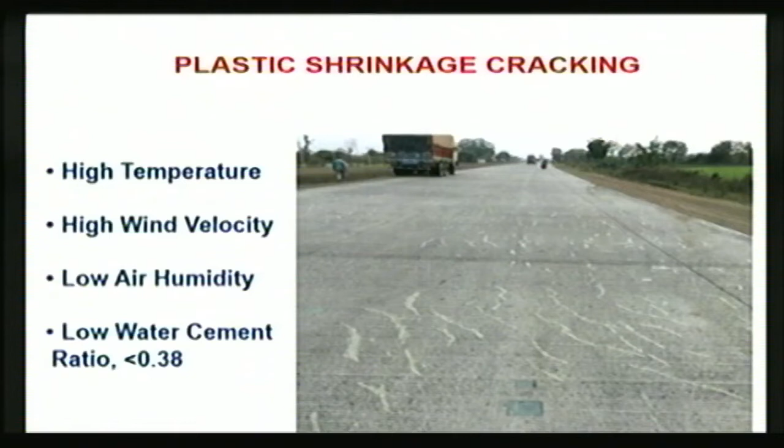These are the same kind of plastic shrinkage cracking. If you use GGBFS, your tendency of plastic shrinkage cracking will be very low. If you use fly ash along with the reduction of water cement ratio, you will have a very high tendency. For normal concrete, it may occur, but the tendency will be low.

Now, how to repair a concrete pavement? It is very difficult to repair concrete. In the context of concrete pavement, we always say prevention is better than cure, because if something happens to the concrete, you have to break it, remove it, and fill the patch with fresh concrete. So breaking and removing the concrete, even if it is a very low grade, low strength concrete, it is a hell of a job. It is very tedious and very difficult. So it is better that all these types of distresses do not appear.

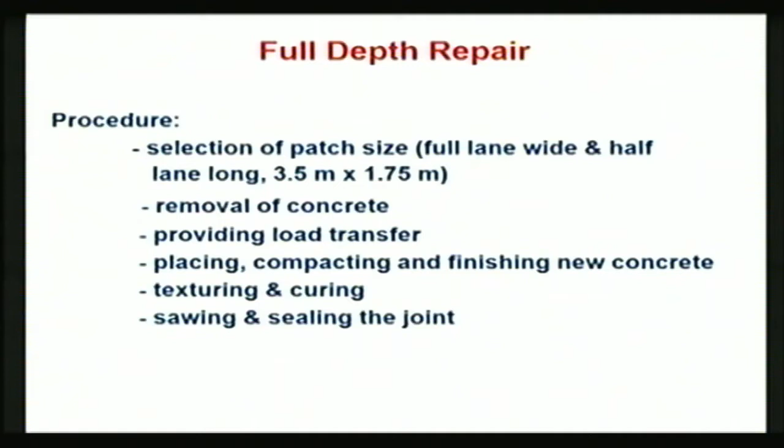Take due care during the construction removal. Width of that portion should also be minimum 1.5 meters. If it is less than 1.5 meters, then it will not behave like a slab. It will behave more like a beam, and different kinds of stresses may appear in that repaired area. So you have to cut the entire concrete, then break it and remove it.

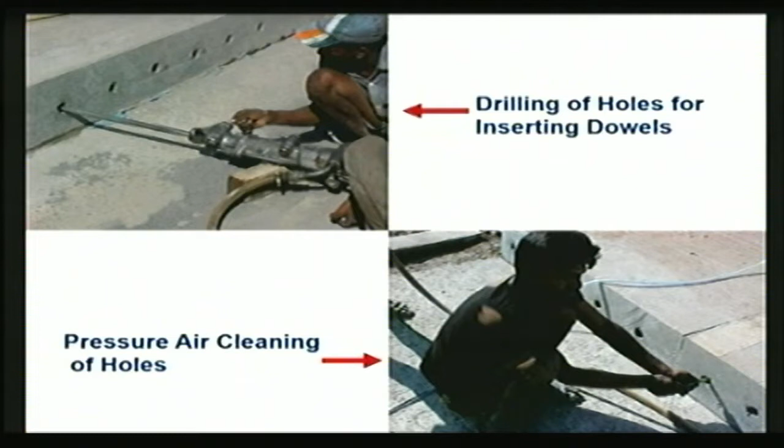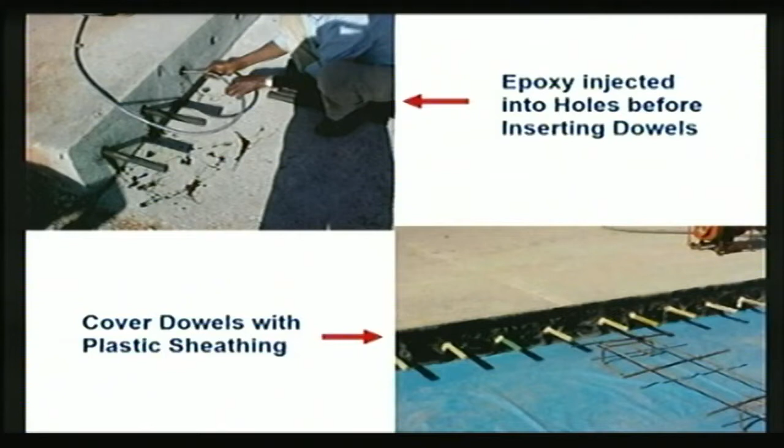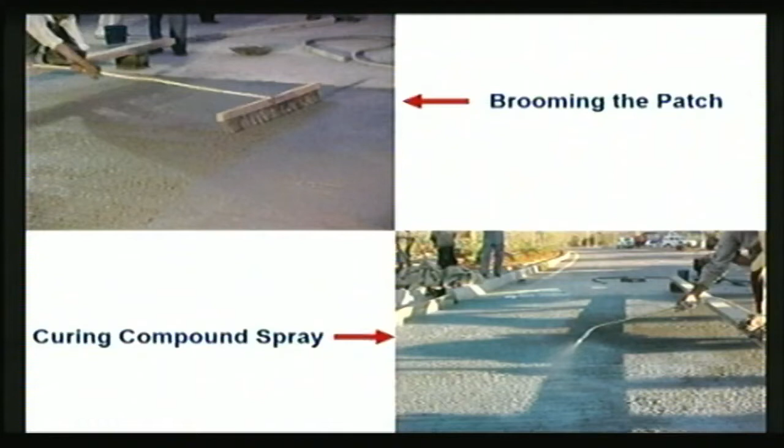After you remove the concrete, you will have two full depth joints. You have to insert the dowel bar: first create the dowel holes, clean out the dust, then neat epoxy is inserted into the dowel holes, and dowel bars are fixed. You can place sheathing caps or plastic caps over the dowel bars, and if the subbase is also damaged, repair the subbase too, then fill it with fresh concrete, compact it, texture it, and use curing compounds so that plastic shrinkage cracking can be avoided.

Sometimes a slab has more than one full depth crack - suppose it has two full depth cracks - then the whole slab will be divided into three parts, so the entire slab has to be removed. The code says we do not accept more than one crack in a slab. If it has multiple cracks, you have to remove it up to the full depth, following the same procedure.

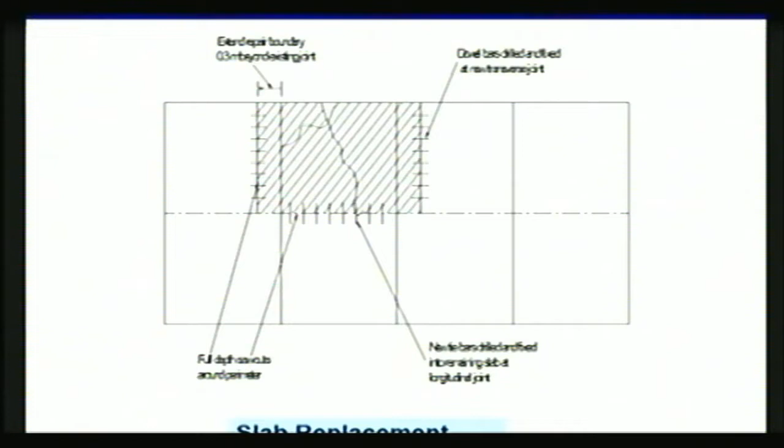But whenever you remove the full depth slab, it is not just the slab, but some extra portion too. Whatever dowel bar assembly exists on both sides has to be removed also, because during removal and breaking of the concrete, all the dowel bars may become loose and will not be effective. So the dowel bars on both sides of the joint have to be removed, and then the entire patch has to be filled up with fresh concrete, compacted and finished the same way.

This is another way of cracking. If you do not do the sawcutting at the proper time, you will observe full width and full depth transverse cracks appearing at an interval of 10, 12 or 15 meters. Those cracks are called working cracks, because they are not structural cracks - though full depth and full width, they did not occur because of structural failure of the concrete. It occurs because you could not cut the joint at the proper time with proper depth.

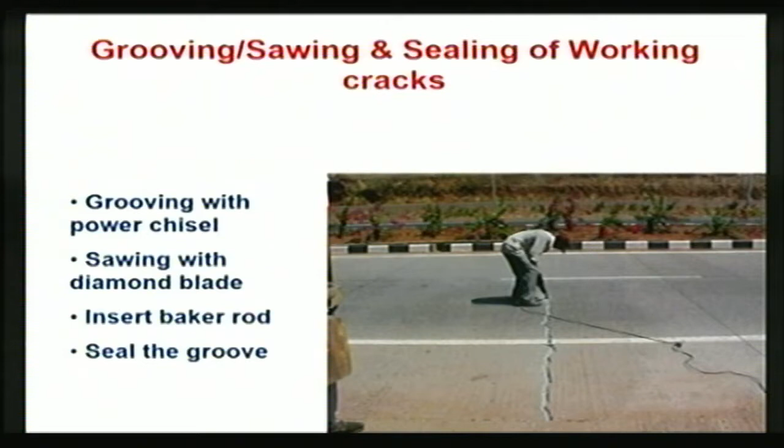So those joints are actually working as a joint, accommodating the expansion and contraction of the slab. So those cracks may be treated like a joint. And what do we do at the joint? We create a groove at the joint and seal it so that water, sand and silt do not enter. We can do the same thing here - if it is a working crack, just prepare a groove along the contour of the crack and fill it with polysulfide or silicone sealant, whatever we normally use for joints.

This is cross stitching. Cross stitching is always used for longitudinal cracks. Any longitudinal crack, before it opens up too much, you have to fix it - you have to cross stitch it. Cross stitching will not prevent the crack from occurring further. What it will do is keep the longitudinal crack intact, in a very close form. It will not allow it to widen up further.

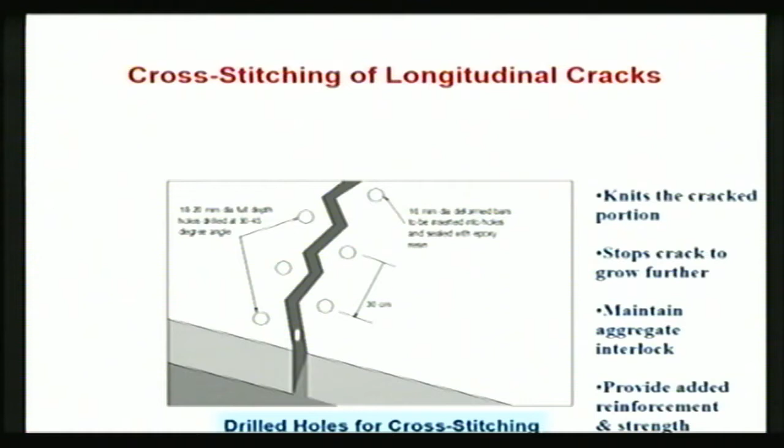So for that you have to do cross stitching. Cross stitching is never done for a transverse crack, because transverse crack movement is allowed, but we do not allow movement at longitudinal cracking - that's why for longitudinal cracking we go for cross stitching. In cross stitching we make inclined holes from alternate sides, then dowels are inserted into those drill holes, and the annular space is filled with epoxies and mortar. On the top surface we will see only circles like this - we have a longitudinal crack which has been cross stitched, and you can see only circles at the surface.

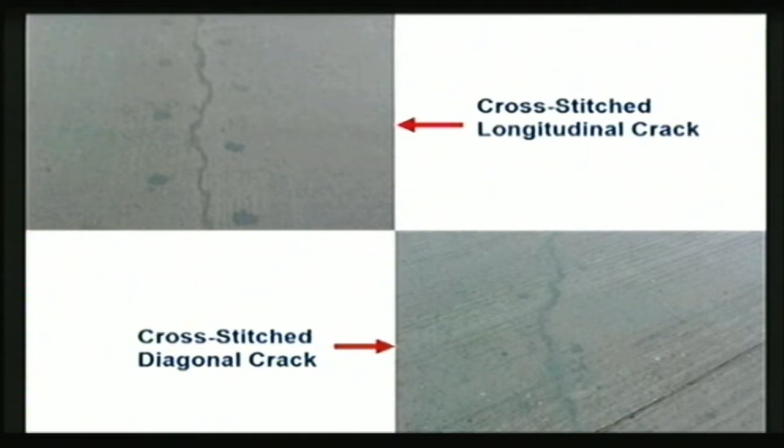Otherwise, dowels exist inside all these drilled holes. So cross stitching will not allow the longitudinal joint, the longitudinal crack, to open up further.

Plastic shrinkage cracking, you have to take care. Just after the finishing of the concrete, you must use curing compound. Second, you can cover your surface with plastic sheets also.

And third, if you have a very high tendency of plastic shrinkage cracking, keep some jute bags ready in moist condition. Water should not be draining out of them, they should just be in moist condition. After texturing the surface, cover the entire surface of the concrete gently, because concrete is still in a green state. If you throw the bags over the recently completed concrete surface, all texture will go. So you have to put all jute bags very gently on the textured surface.

Sir, 2 minutes. It's okay, sir. It's over now. So plastic shrinkage cracking is preventable.

First, see your mix. It should not have a very low water cement ratio. Normally we do the concrete PQC at 0.38 and 0.4 water cement ratio. That is the ideal, that is the best water cement ratio. Do not come down to a water cement ratio of 0.32 or 0.33 just for the saving of cement.

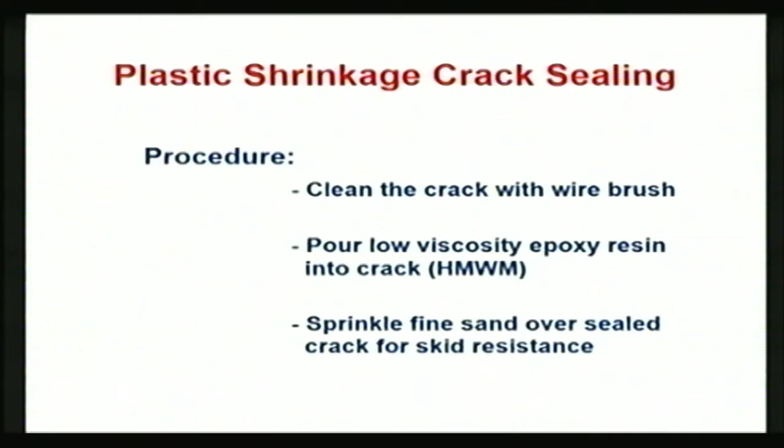You can save the cement if you use slag in your concrete pavement mixes. So see what is the mix, it should not have a very low water cement ratio, and then cover the surface with plastic sheathing and moist jute bags.

If you are not able to do that and plastic shrinkage cracking has occurred, then they will remain there throughout the entire life of the pavement. What we can do, later on we can fill them with neat epoxy.

First, clean the crack with a wire brush so that every bit of dust comes out, and then you can have a water-like thin epoxy that can be filled into the cracks.

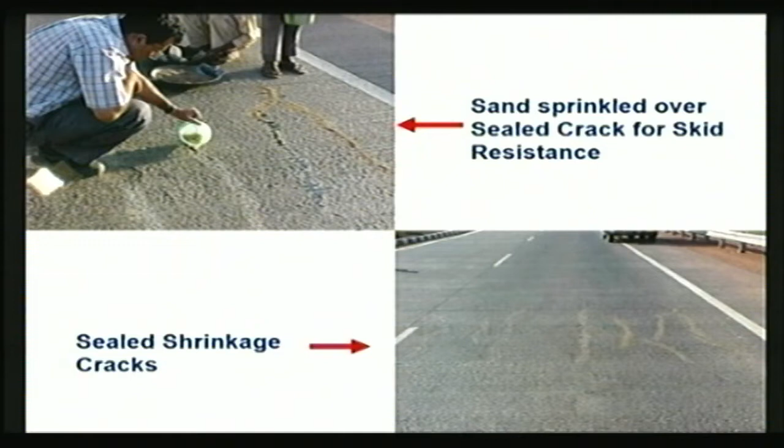And after filling the cracks, you can spray some fine sand over the epoxy so that it bonds with the epoxy, and you will not have a very shining or very smooth surface which is prone to the skidding of vehicles.

This is the last point. If your concrete is very poor, then after opening the traffic, you will see a very rough surface, with the total texture removed from the surface. It is an indication that your concrete is not of M40 grade, and definitely it is less than M25 grade, because concrete up to M25 or M30 grade may have some traffic without removing the texturing for some time.

But whatever we suggest for concrete pavement for national highways or state highways, it should not be less than M40. If the surface has been abraded, it is a clear indication that your concrete is of poor quality, and there is no other way - then you have to go for a bituminous overlay, either mastic asphalt or BC, or again you have to go for a bonded concrete overlay.

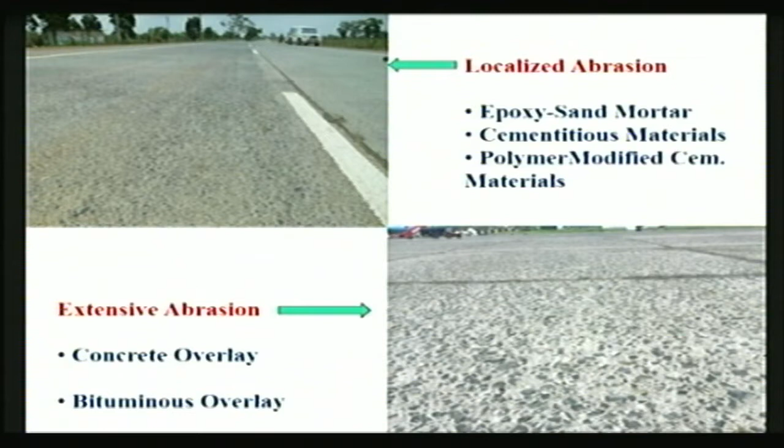So always use concrete of proper mix. So I repeat, pay attention to your concrete mix, take care of plastic shrinkage cracking just after 2-3 hours after placement, and make saw cut joints after 8-10 hours to 24 hours.

Complete all these and take care of uniformity of the support. If you take all these care during construction, I can guarantee that whatever pavement has been designed for 30 years, its actual service life will be more than 30 years, and examples have been there.

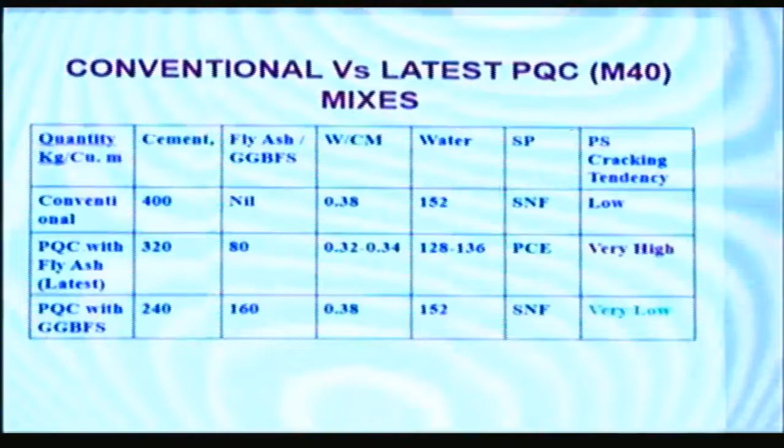When PQC is made with fly ash, a normal mix without it has 400 kg cement with a 0.38 water cement ratio. When you replace cement with fly ash, you come down to 320 kg cement plus 80 kg fly ash. But to achieve the same 7 days or 28 days strength, you have to lower the water cement ratio to 0.32 to 0.34, and you have to use PCE based super plasticizer, because only PCE based can give you workability at that lower water cement ratio.

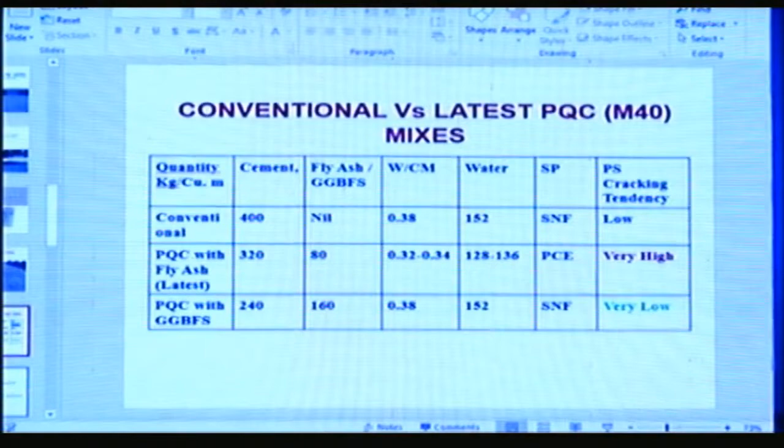And if water is very less in your mix, your tendency of plastic shrinkage cracking will be very high, because the rate of bleeding will be very low and rate of evaporation will be too high.

In case of GGBFS, even if you replace 40% of the cement by GGBFS - that means 240 kg cement, 160 kg GGBFS - you can keep water cement ratio as it is, 0.38, without any downfall in your 28 days strength. And you can use the normal naphthalene based super plasticizer. Even you can use PCE base also, but there is no need to lower down the water cement ratio.

What I wanted to say is that in all these three cases, you can always use a lower grade plasticizer without any cracking issue. It has got nothing to do with the base of the plasticizer - it has something to do with the mix. You can use any plasticizer for workability.

Last Friday, around the same time, me and Vinod had a similar discussion in Delhi - you can use any plasticizer, but keep the water cement ratio at 0.38.

What he means is just to reduce cement, don't go into a high-end PCE based admixture. Am I right, sir? Right, sir - just to reduce cement, don't go into a high-end one. That would lead to more cracks than going with SNF, or a combination of SNF and mid PCE.

Water cement ratio is critical. Whatever be the kind of super plasticizer, it should not be less than 0.37 or 0.38.

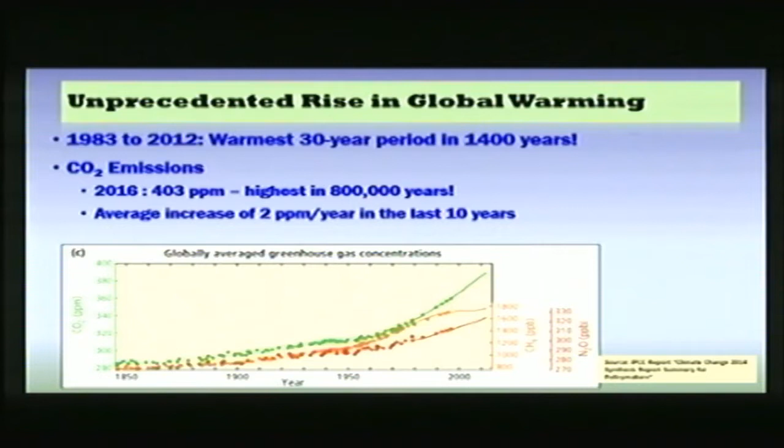We are facing literally a very serious situation as far as global warming is concerned. Some data shows that the average increase has been 2 ppm for CO2 and other greenhouse gases. A very serious situation. Why has it happened? Of course we can always blame the population rise, that our Mother Earth is unable to sustain such a large population rise today.

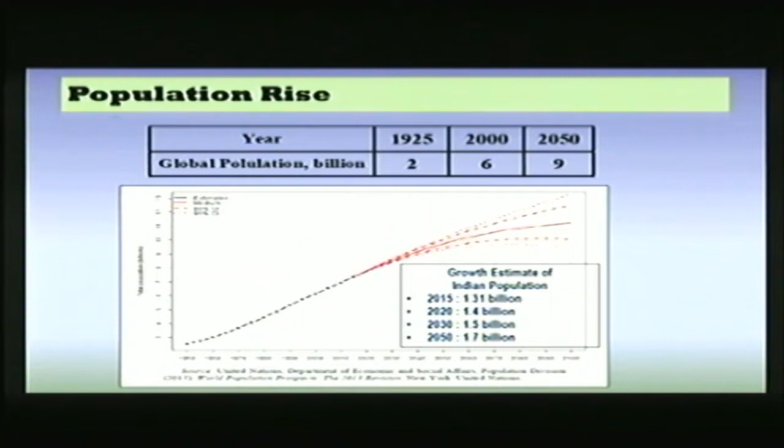Even India, we are experiencing a very large population rise. Then, to sustain such a large population, the industry wheel must go on. And the urbanization and industrialization has been happening. We are experiencing a reversing trend here as far as the urban scenario is concerned.

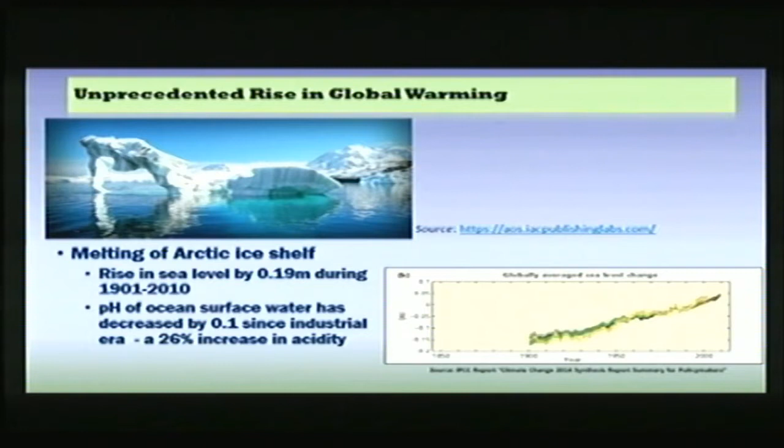And then, this has also happened as far as the levels of the sea have risen. The water of the sea itself is unable to absorb CO2. Now it has become acidic. And all this has resulted in a situation where we are also, in India, experiencing a similar scenario.

We have been expanding our urban centers. We were just 25 million-plus cities. In 2011, we changed to 53, so almost doubled. And all this has been happening simultaneously, a lot of development, including the use of concrete, which is essential, I would not deny it.

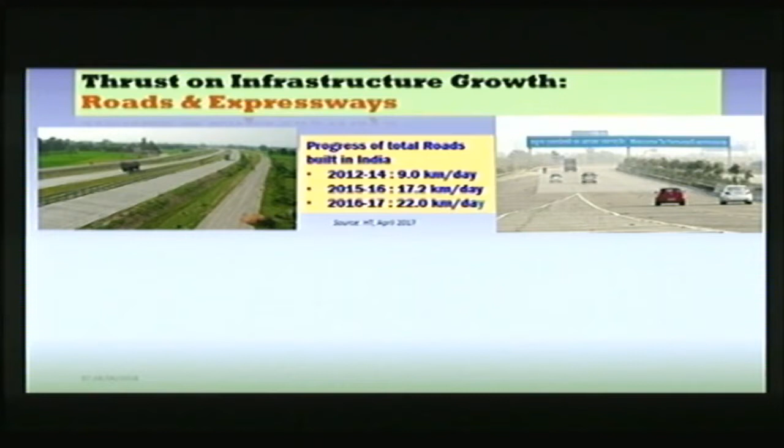But the question is whether such development is sustainable. We have large projects going on at the moment, and also we are experiencing simultaneously extreme events.

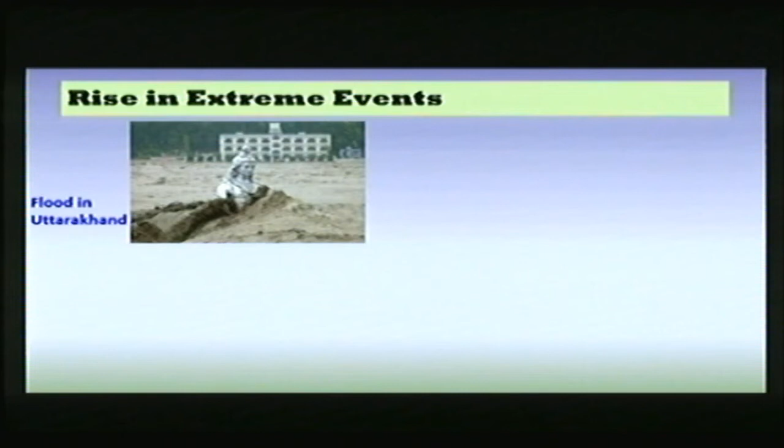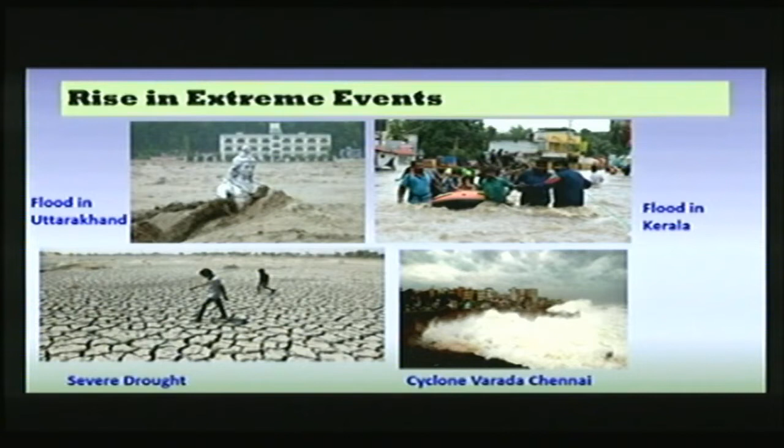In 2013 we had floods in Uttarakhand. We have recently had floods in Kerala. We have drought in some parts of the country, and we have a cyclone in some part of the country. So extreme events - everybody agrees, all scientists agree, that it is because of the rise in CO2 emission and because of the rise in temperature.

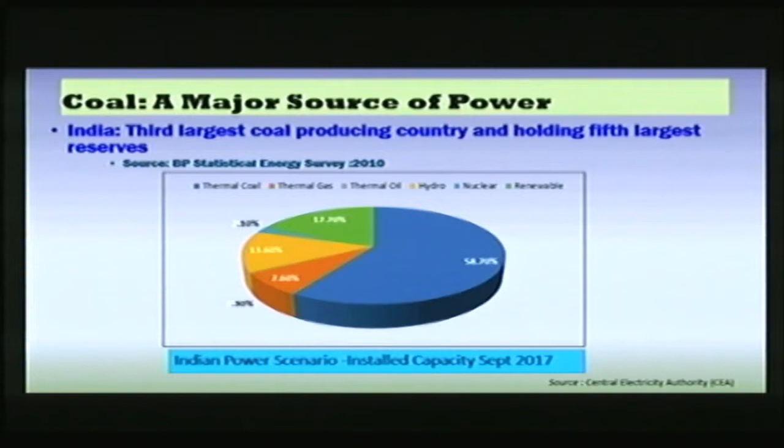And as far as our country is concerned, we can't escape this - that in spite of all the hype about renewable power, coal has still remained the main source of our energy, and because of coal and other effects, we have gone to number 3 in emitting CO2 emission today in the world.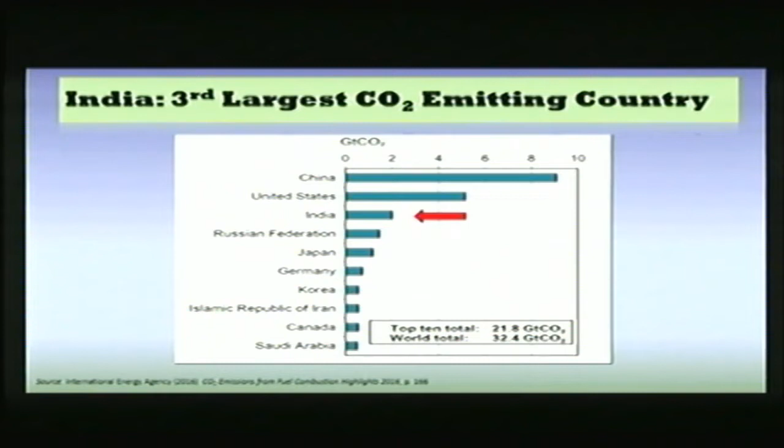And our scientists are trying to avoid these questions. There were some studies which showed that after all, our average emission is less than the world average. But the fact remains that we are amongst the top 5 as far as CO2 emission is concerned.

We have to take this situation seriously, and fortunately the government is aware of it. Our government has pledged in the Paris Convention that it will reduce greenhouse gas emissions by 35%. It will also reduce 40% of electric power consumption to be replaced by renewable power. A lot of emphasis is being given to that, and also we will increase our forest cover.

As far as industry is concerned, our own industry, we are the largest users of materials, water, land and energy. So we have to be more particular about the CO2 emission and greenhouse gas emission. And concrete, being the largest man-made material, has more responsibility as far as total CO2 emission is concerned.

At the same time, we must also understand that concrete is an eco-friendly material. I say eco-friendly because it requires the least energy per unit of consumption. If you compare different materials, the energy consumption required for production of one unit of concrete is much less than other materials. It yields the least byproduct in its production. On the contrary, it has the capacity to absorb byproducts of other industries, like fly ash and GGBS we have been talking about.

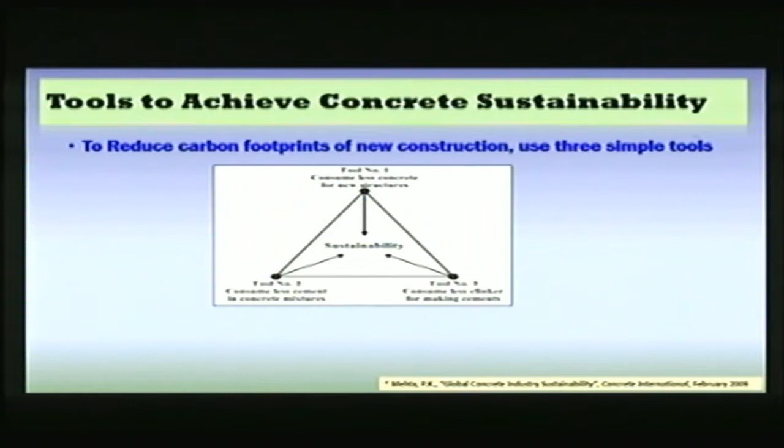So the first question that arises, and I have been talking about it since I was president, is whether our country has sufficient resources to produce the kind of development that we are postulating, as far as concrete is concerned.

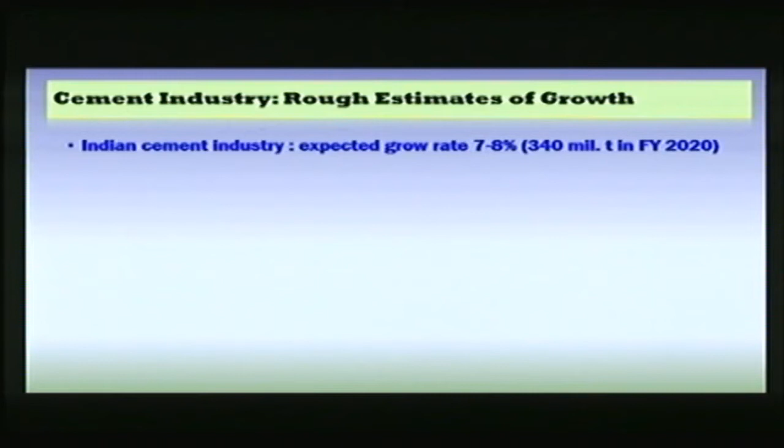Indian cement industry is experiencing growth today, and it will continue. Today we are producing around 300 million tons, with a capacity of about 450 million tons, and we are expected to grow at around 7 to 8%. Good for the industry, good for development, but at the same time,

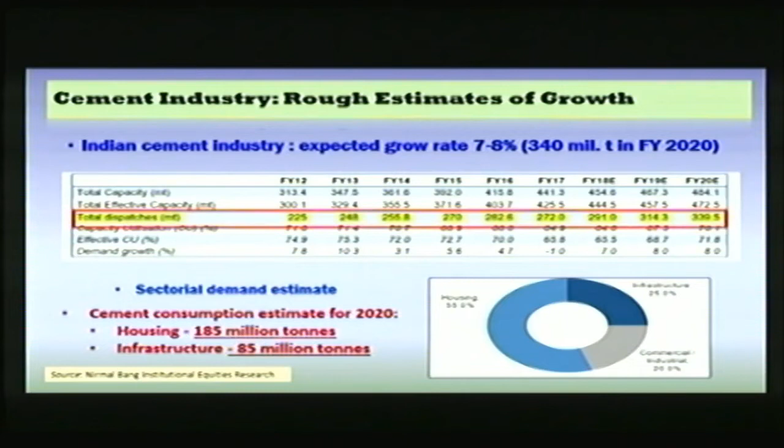we should see whether we have sufficient resources to produce. For example, take limestone. Do we have sufficient limestone? The answer is no. The answer says that we have limestone reserves which can be ecologically extracted that can last us for another 35 to 41 years. This is the report from the Planning Commission.

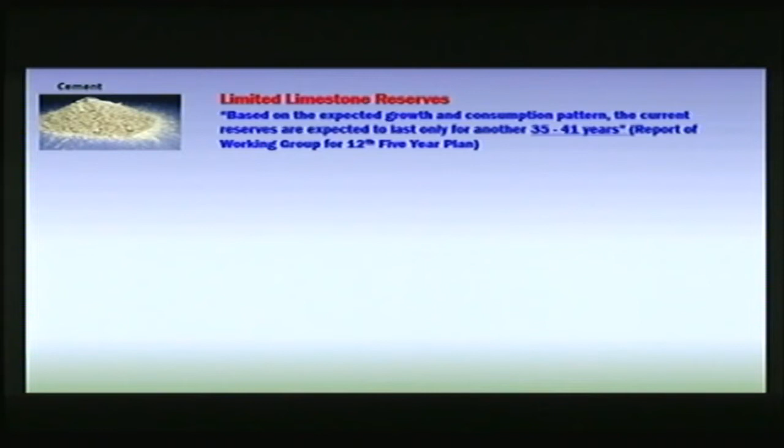Coarse aggregate, leads are increasing. Everybody is experiencing that the leads for bringing aggregate to major urban centers are increasing because nearby aggregates have been exhausted. River sand has vanished, and rightly so, because it created havoc for the ecology of the rivers. Our rivers have become really ecologically dangerous.

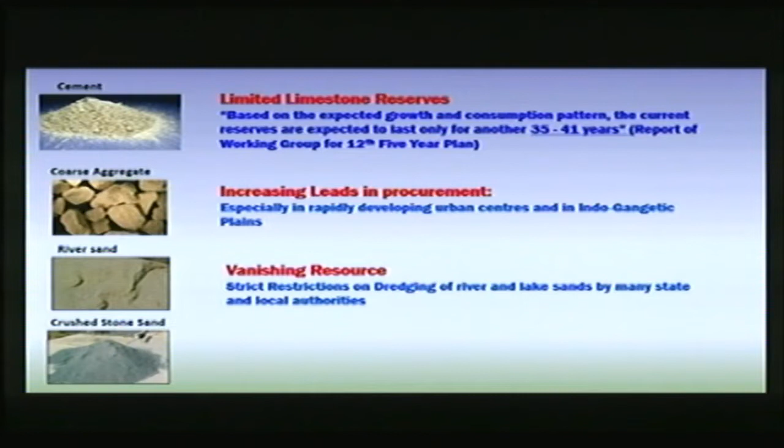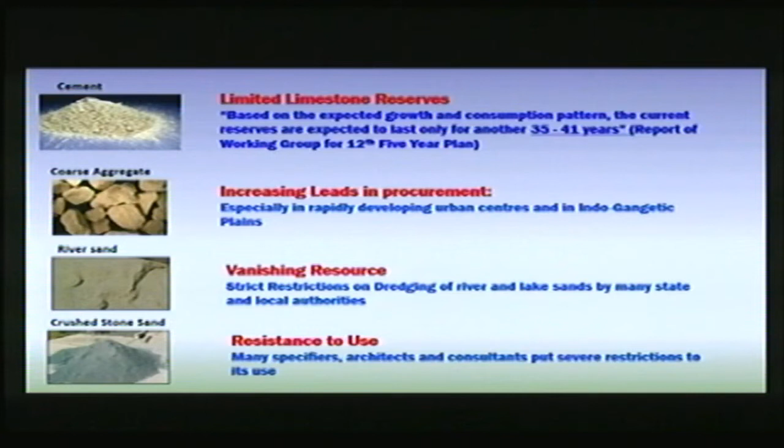And crushed sand, we find there is still resistance among some quarters. Of course, many people have started accepting it, but many are still opposing the use of crushed sand. Water, we are still facing drought situations in many parts of the country, and we have less water per capita, so water availability is also becoming less.

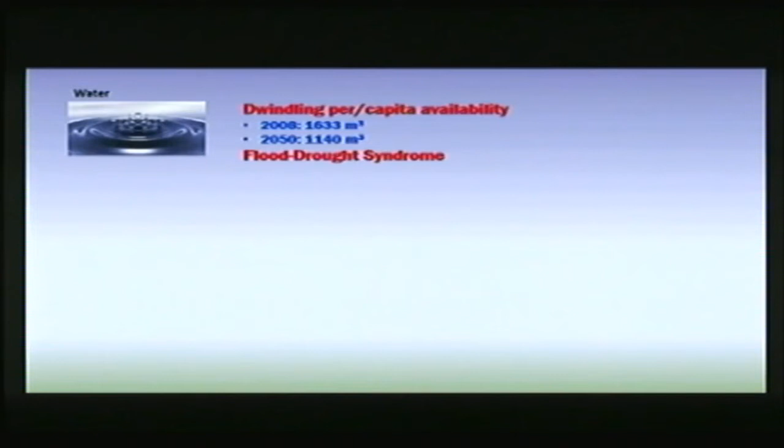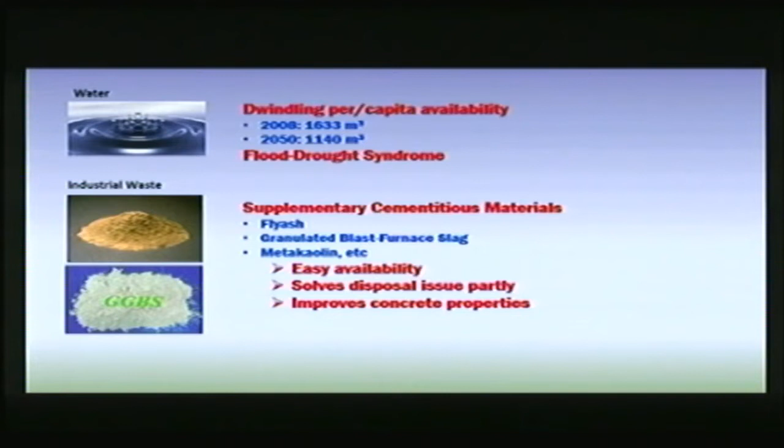But at the same time, we have lots of industrial waste, heaps and heaps, mountains and mountains created over previous decades. So we can use it, we can use it in a better manner.

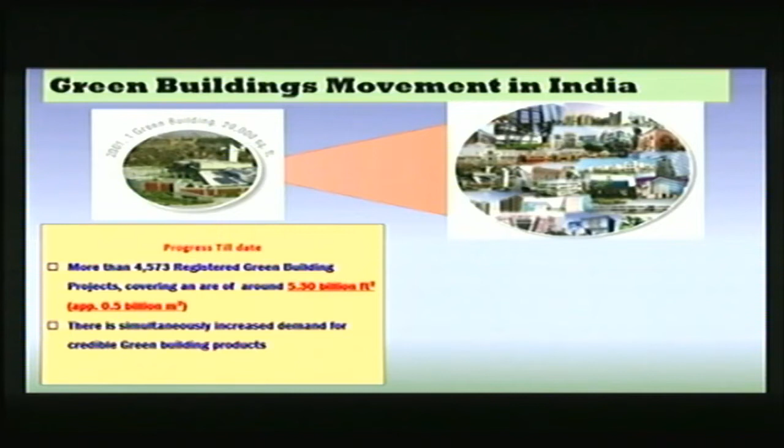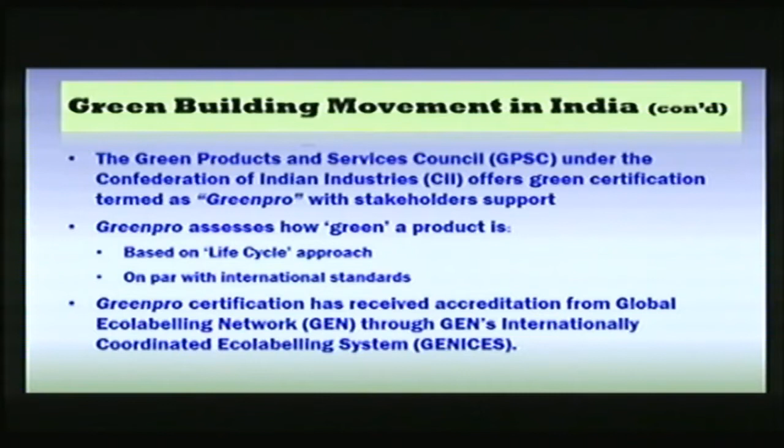Now let us see what's happening to the green building movement. Fortunately for us, the green building movement is increasing, and as of now around 5 billion square feet has already been created as green building, and they are planning to go to 10 billion, which is a very good development. But the people leading this are the Green Products and Services Council, GPSC, of the Confederation of Indian Industry, and they have produced a number of green products.

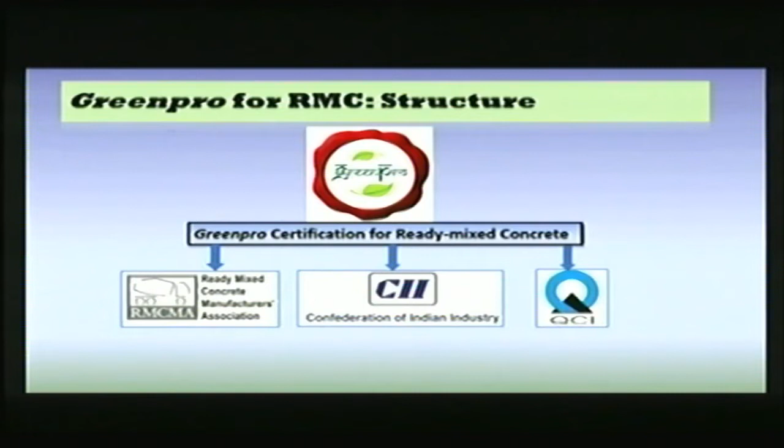And recently we have approached them and asked them to produce a similar kind of certification and structure for concrete as such. This is a joint effort by the Ready Mix Concrete Manufacturers Association, CII, and QCI, and this initiative is now supported by the International Finance Corporation.

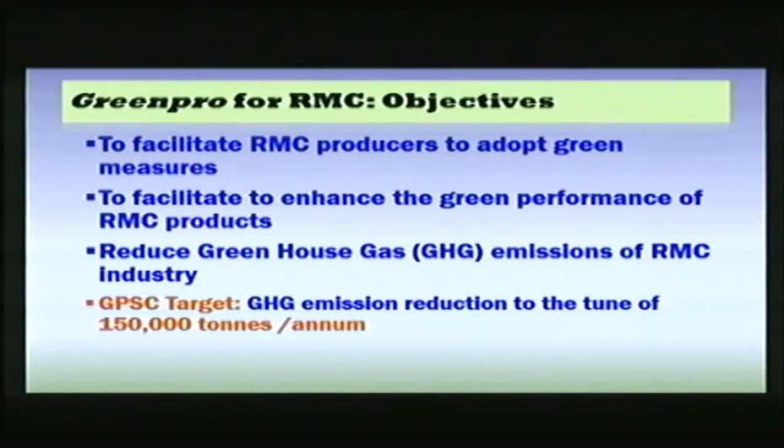So the objective is to facilitate RMC producers to adopt more and more green measures, enhance green performance of the RMC product, and reduce greenhouse gas emissions. They have set a target to reduce greenhouse gas emissions by 150,000 tons per annum if people start adopting green certification for concrete.

Already there are many people who have started adopting this thing, and I would try to make a broad framework under which we can call it green. Till now there was a misconception that if you use some amount of fly ash, some amount of GGBS, you become green. That is not the concept.

The concept is derived from the Cement Sustainability Initiative, taken by the World Business Council for Sustainable Development, and we have followed their principles—8 principles: product design, product performance, raw materials, manufacturing process, waste management, life cycle, product stewardship, and innovations. These are the 8 parameters on which we measure the performance of concrete.

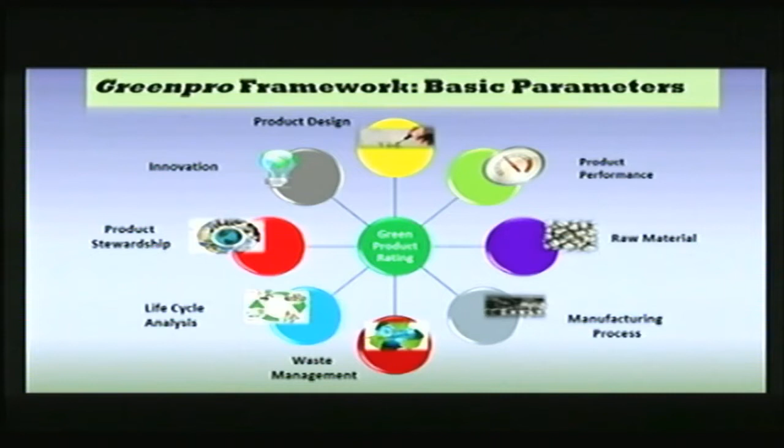For that purpose, we are also trying to find out how ecological, user-friendly, and eco-friendly a product of concrete is. For example, you use high SCM concrete—whatever is permitted by the code, 35% replacement of fly ash and 70% replacement of GGBS.

If anybody is doing more than that—and there are many cases—we are using high volume fly ash concrete, we are using plain concrete. Yesterday, Dr. Chatterjee himself showed that plain concrete volumes are so big that we can certainly use higher and higher percentage of SCM in that. So one who uses more than the code specified values gets better marks there.

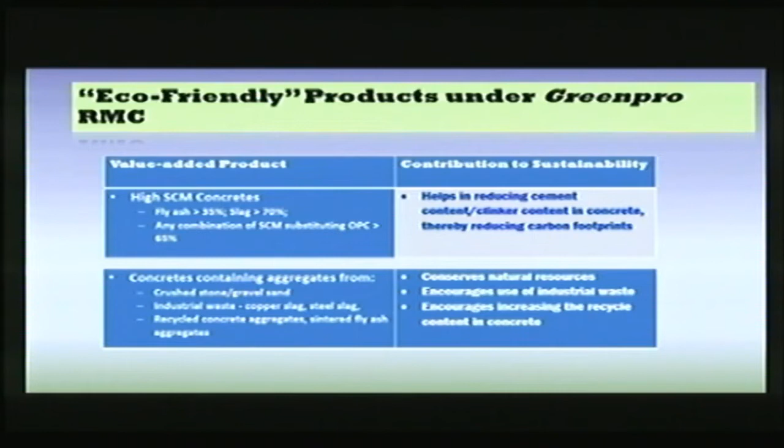Then aggregate. We are dead against the use of river sand, and we want people more and more to use manufactured sand, or what we call crushed stone aggregate or crushed gravel aggregate. This is because very few people are aware that in recent times we have seen very serious failures because of unauthorized extraction of river sand from big rivers.

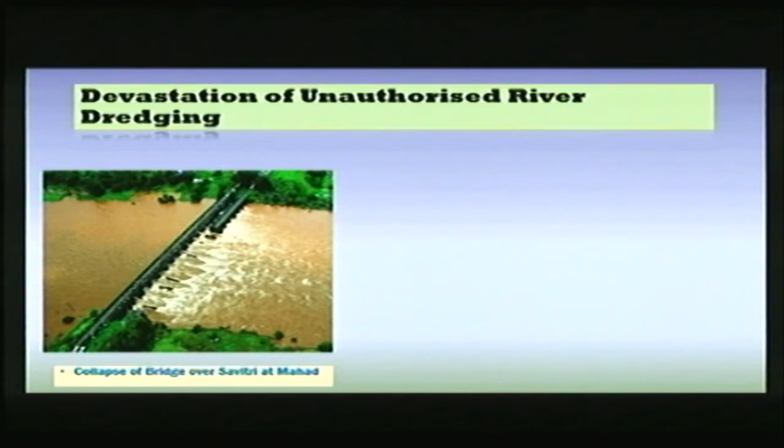One example which we know is that the Savitri river in Mahad just collapsed during the floods. Nearby people were extracting sand, and this is one of the reasons why the bridge has collapsed and many people have died. Recently, we have a case of Vaitarna bridge, again from Maharashtra.

I come from Maharashtra, so I have many cases from there, where people were extracting sand, and ultimately the bridge went into such a serious situation that the well foundation cracked totally, and they had to renew it. So it is important for our community today that we take a pledge that we will not touch our rivers. We want rivers to flow in their own fashion. So why not take a pledge that we will not allow the use of river sand.

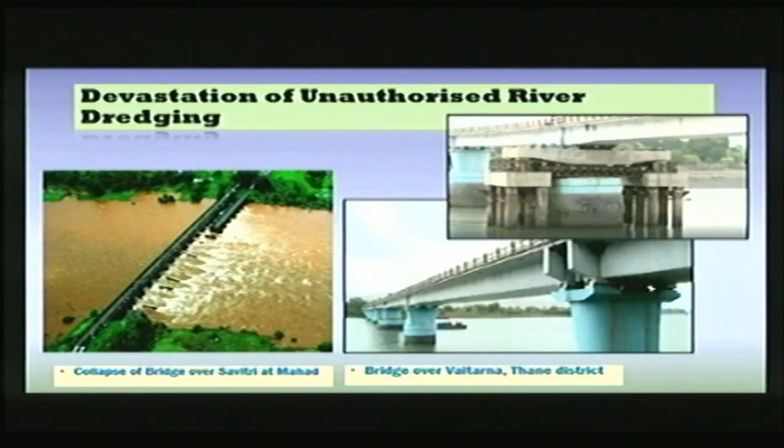Second important thing is thermal insulation and sound insulation, which can come in many ways. One is by using low density concrete, made with foam or expanded polystyrene, or by using perlite. And here we can get many advantages.

The simple thing we can do is change our brickbat coba, which we use on buildings. Why can't we use, instead of brickbat coba, a similar layer of thermal insulation using lightweight concrete? It will give better impact.

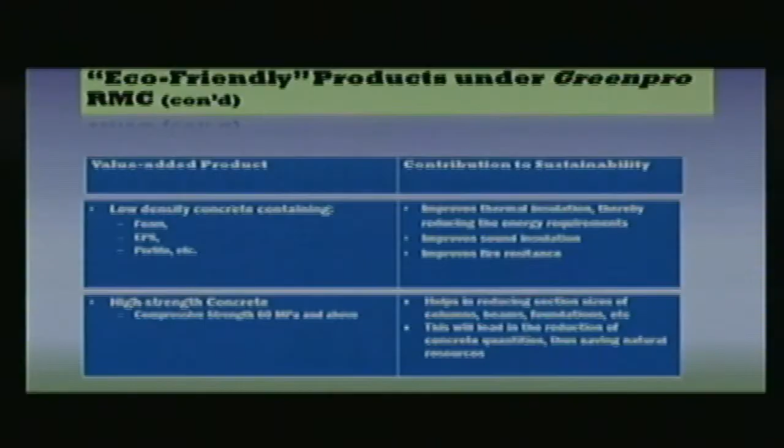High strength concrete—as we already know, as we increase the strength, we can reduce the section sizes. This is what is happening in Mumbai, where any tall building is using high strength, high performance concrete. By increasing the grade of concrete from M40 to M80, M90, you reduce the section as well as the reinforcement, and most builders are now adopting this. Ultimately it leads to the use of lower amount of concrete, and we save a lot of resources.

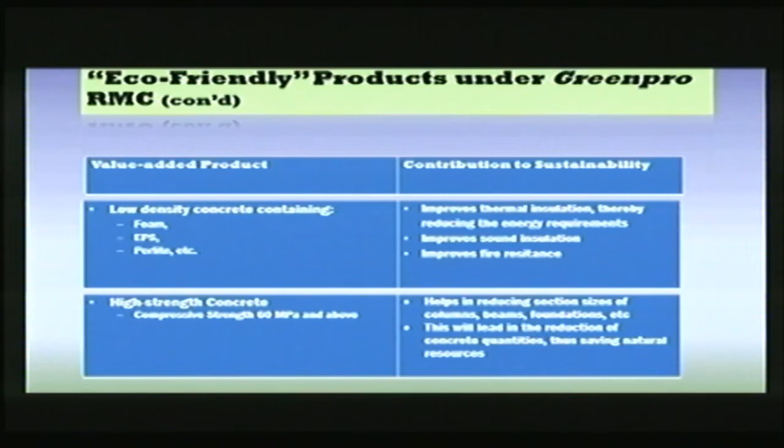Another example is self-compacting concrete, where we don't need any vibration, so there is no sound, and that is why it is more sustainable. Another example is pervious concrete. Unfortunately, in our country we are not seeing any big movement to use pervious concrete, because it is one of the best solutions for rainwater harvesting and improving the quality of groundwater. This has to come in a big way.

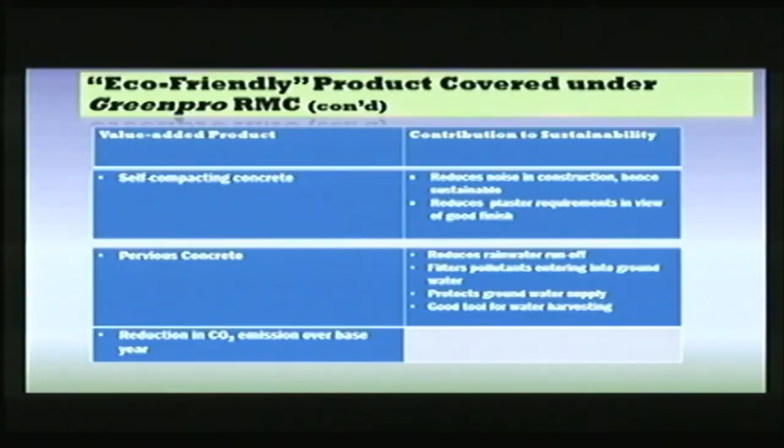After one goes through these examples, we can actually measure over a period of years to get results. So all these three conditions are essential.

Yes, last slide, I think. And this is the evaluation process, which has been done by the Confederation of Indian Industry.

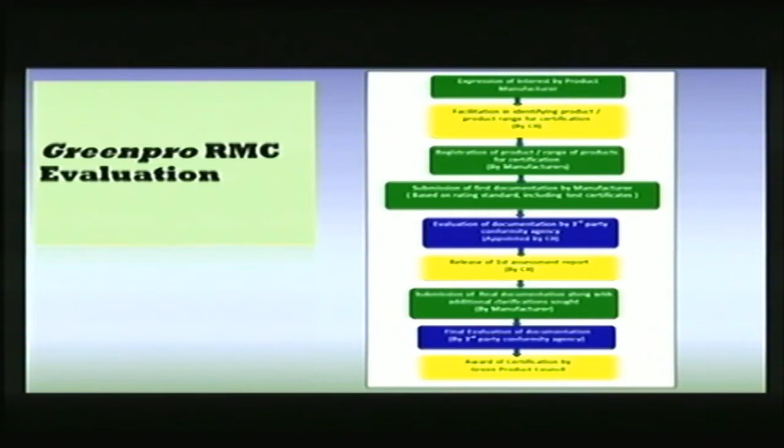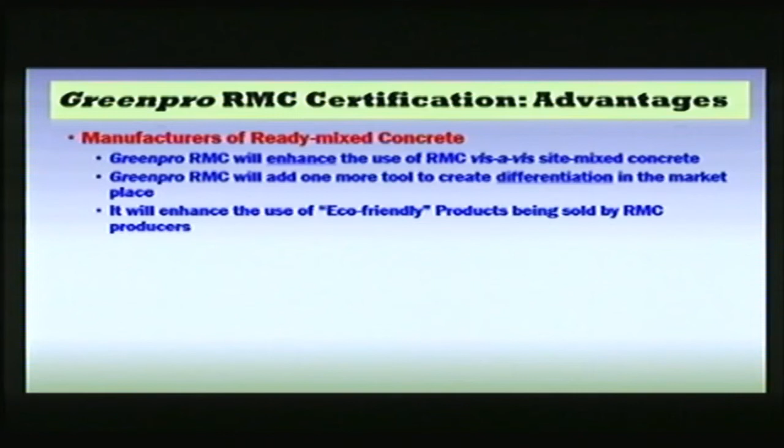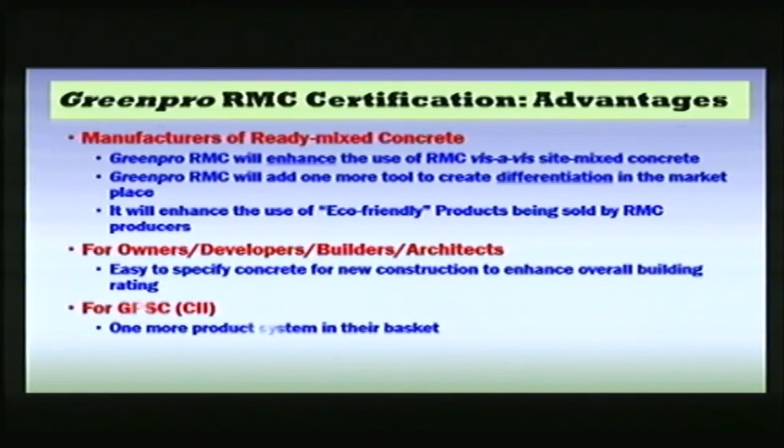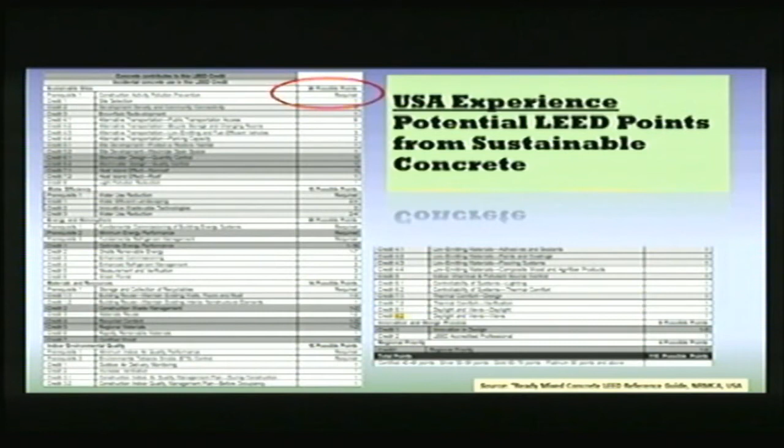These are the advantages of using such products - green certification will help the producer as well as the end users in a big way, and ultimately lead to sustainable benefit. I'll give you an example from the United States, where they have used this certification. They found that you can easily get 26 points out of the minimum required, which is about 56 points - so you can get 50% of the points. So if you want green certification, LEED rating certification, this is the way. You can use concrete in a greener way to get maximum benefit, get gold rating or platinum rating. Thank you very much.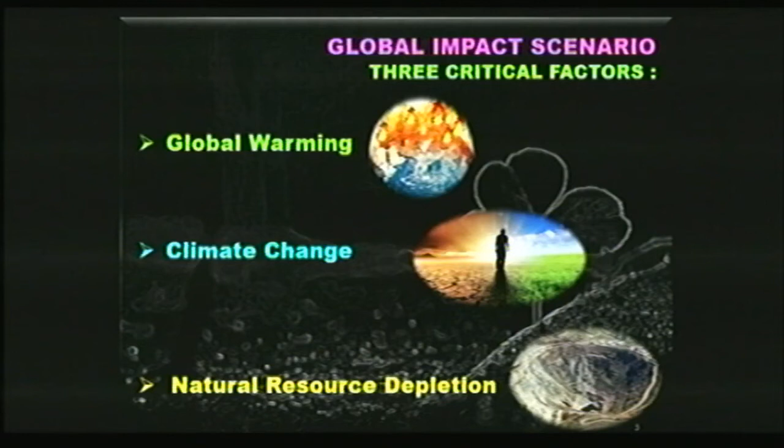But these are the three important critical factors from an engineer's perspective. What exactly are these three important factors which are bothering us? One is global warming, second is climate change, and third is natural resource depletion. We engineers are directly responsible for these things. Global warming is, of course, an increase in the average temperature of the earth's surface, mainly because of human activities - human development, growth, all these human activities essentially for human comfort, will add to global warming.

Second is climate change, which refers to long-term changes in our climate. We need to understand the difference between weather and climate - climate change is probably one of the long-term effects. The third is natural resource depletion, which is the result of unscrupulous use of non-renewable resources. In all these three cases, we as civil engineers have a greater role to play. Before we go on to today's topic, how do we actually evaluate this? In terms of percentage, we engineers do not talk subjectively - we need to quantify. And how do we quantify? I think that is what the next few slides will show.

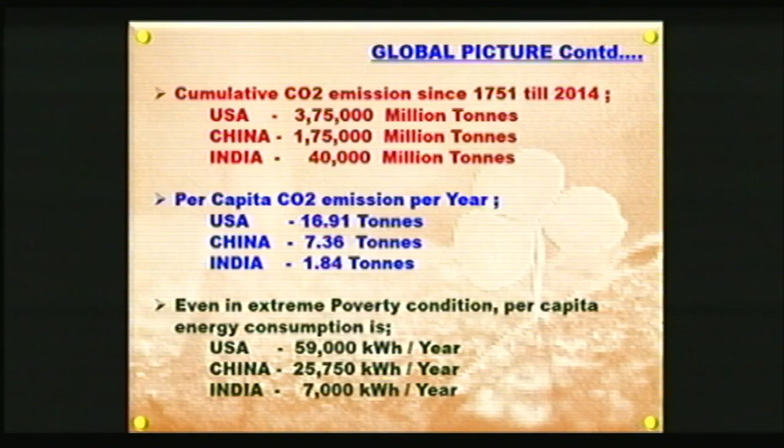Now with this, it looks a very happy situation at this point in time, but it is not so with the increasing population. We have exactly China as an example of how the growth impact has impacted. Now let us come to per capita emission. India is 1.84 tons per year, as against China and USA - you have the figures.

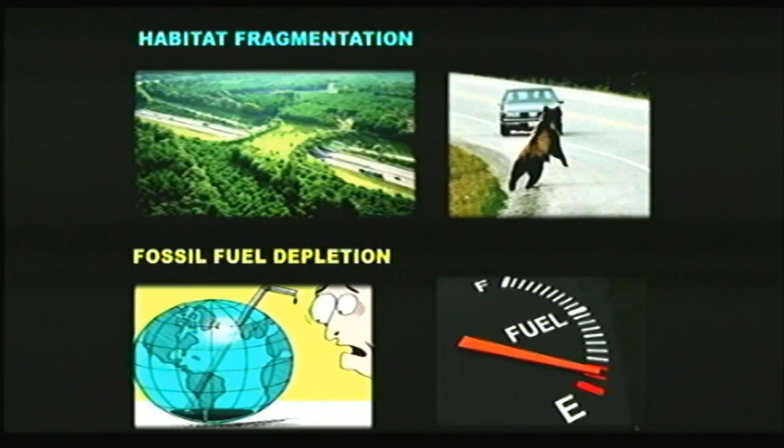Now let us look at a few impacts on the second part of it - what exactly is the impact because of climate change? We just saw the impact because of global warming. Look at the climate change part of it. We have habitat fragmentation, fossil fuel depletion happening, ocean acidification, eutrophication, loss of biodiversity, etc.

India is considered one of the 12 mega-diversified countries in the world. We approximately have about 1.3 lakh species, flora and fauna put together. At this point in time, with the present global warming and rate of increase in temperature, we have already lost about 50 species available in India, and almost another 50 species are endangered, including human beings. Now there are two important phenomena, dear friends, which have not been considered by anybody.

These two important phenomena impose a tremendous amount of effect. One is called polar amplification. This is actually the drying up of ice in the poles - for example in Iceland, in Greenland, and the ice sheets of Antarctica - all these are melting. This melting of ice, which if it had not melted would reflect an enormous amount of solar radiation back into the atmosphere, but now because it is melting, a lot of open land is available for absorption. This is called polar amplification.

Another important phenomenon is called the permafrost phenomenon, wherein the land, with the trees, the bush, the greenery, gets submerged in the ice. This may be applicable even to the Himalayan mountain region. When the plants die below the ice, the carbon which was inhaled by those trees and plants remains trapped in it. Once the plants die because of the ice cap on top, and once this ice melts, there's a huge amount of carbon dioxide released from these dead plants. This phenomenon is called the permafrost phenomenon, which is one of the most significant.

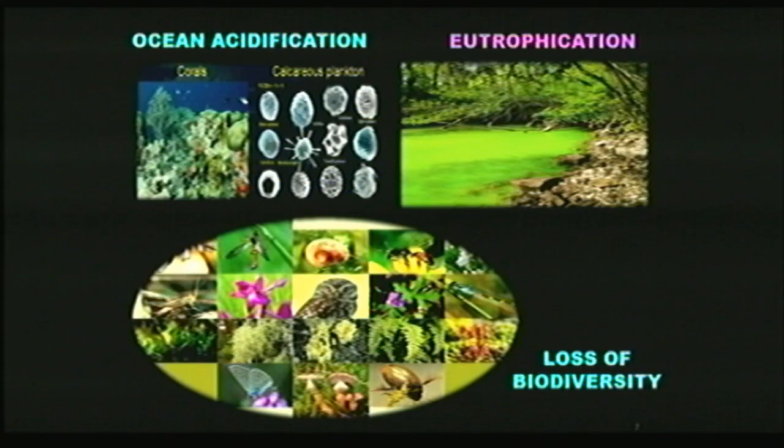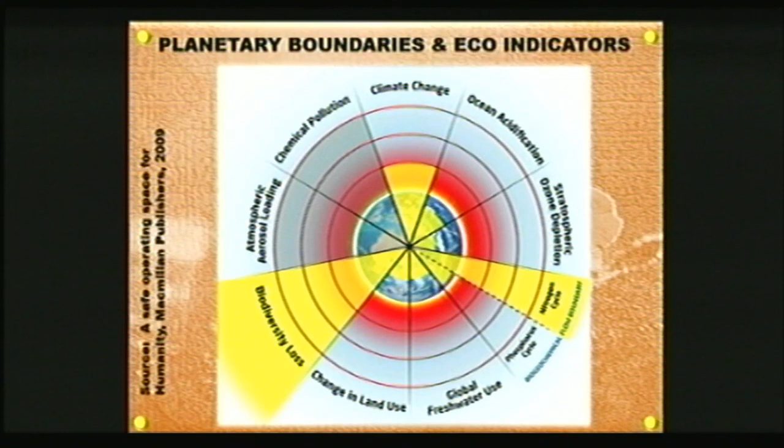These two important phenomena have not been considered by anybody while calculating the greenhouse effect or the sustainability aspect. Now we also come to about 9 important indicators - they're called the global indicators or the tipping points. This is called the planetary boundaries or eco-indicators, where these 9 important eco-indicators are brought together to give us exactly what the tipping point is. We are all concerned here, dear friends. Please don't say that civil engineers are not related to this - we are the nation builders, and every aspect of it comes to our shoulders. For example, the yellow bands show the points where we have already tipped off.